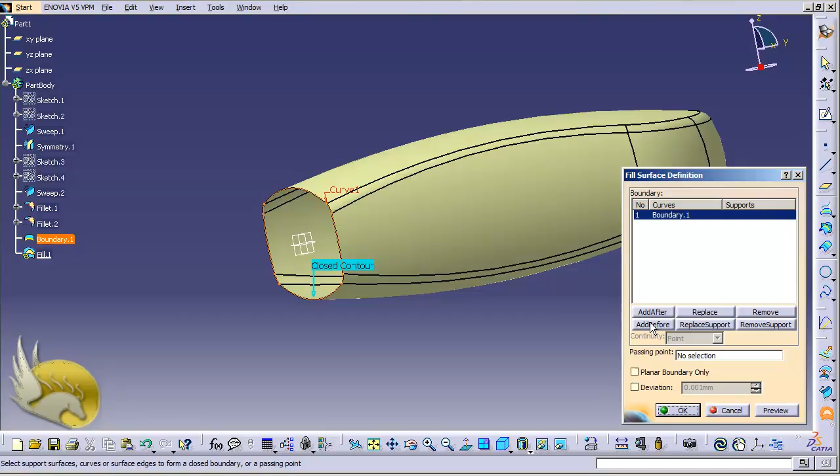Now I can go to Insert Menu, Surfaces, and select the Fill tool. It asks me about the boundary. I select this, and I do not need to modify this selection. I click OK, and I can see that this closes the area. So I hide the boundary, since I don't want to see it here.

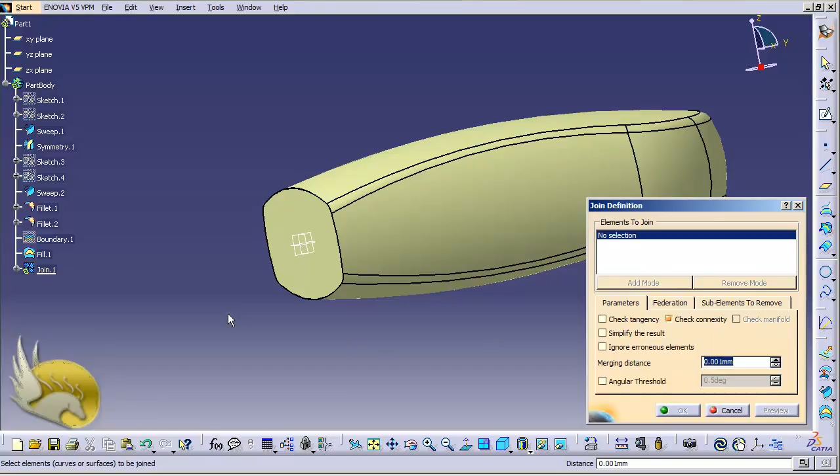The next thing I want to do is join these two surfaces together. So I go to Insert menu again, and under Operations you can find Join. Whenever you select Join, you can select the surfaces - this is the first surface, this is the second surface. Now I click OK, and you can see that the two surfaces have been joined together.

Okay, I want to have some modifications in this bottom area. I want to have a sunken area here so that it makes a prettier surface. So let's select one of the planes - the YZ plane is okay. Here I go to the sketch area.

To create the sunken area, I select the arc tool and draw a very small arc like this. This is going to be an arc. I add some kind of constraint here - I want to make sure that this is about 30 millimeters in radius, so I click OK.

Now you can see that I already have a coincidence here, but I don't want this coincidence - I want to have a kind of symmetry instead. So I select this, select the horizontal axis, and add a symmetry constraint. That's much better than coincidence.

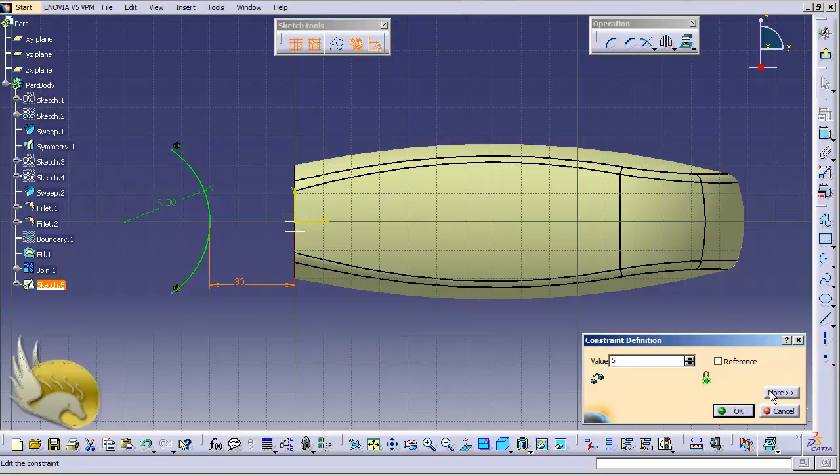Now I have this. I want to select the constraint tool, select the center of coordinates, and select the arc. I can see that this is too much - I want it to be about 5 millimeters, and I want to have it on the other side. So I click on swap location, and I can see that this is here. Now 5 millimeters is too much, so I make it 3 millimeters. I click OK, and I can see that it is cutting the end of my shampoo bottle.

Now it is going to be used as a curve for my sweep, so I exit my workbench. Now that I have this curve, I want to have another profile that creates the actual sweep here. For this, I need to have a plane and a profile. I click on plane here. This type of plane is going to be normal to curve, so I select Normal to Curve.

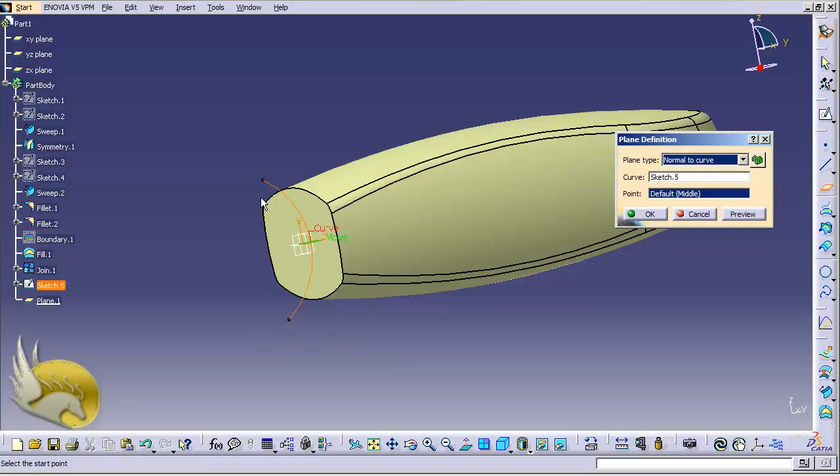It asks me about the curve. This is the curve, and it asks me to specify a point on this curve. I can see that I have two endpoints. This is going to be the point that I select. I can see this is created.

So I click it, select this plane that I have just created, go to the sketch environment, and click here. Now if you see that this plane is in the other side, I can click on normal too, and you can see that it swaps the location, but this is here, so I do not have to go to the other side. So again, I need to create another curve.

So again, I click here and create a curve like this. And this curve is going to be about 30 millimeters again in radius. This is going to be moved this way, and I need to have a symmetry.

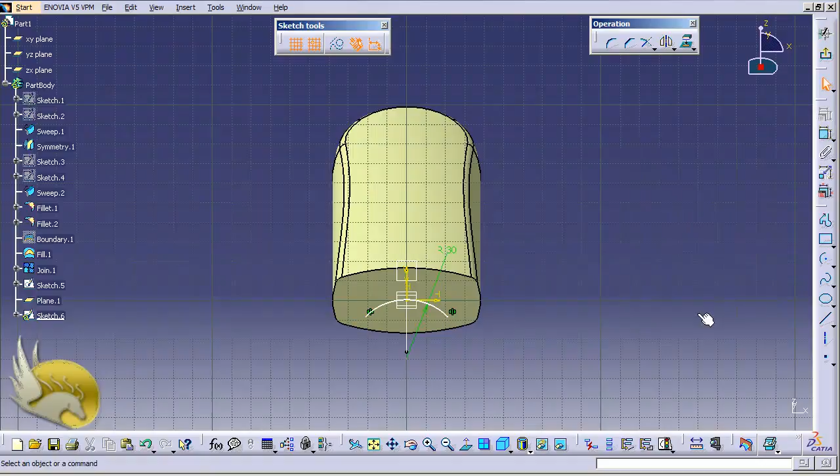So I select this point, and select the vertical axis and go to create a symmetry here like this. Now it's created like this. Let's shift a little bit and see if this is working just fine.

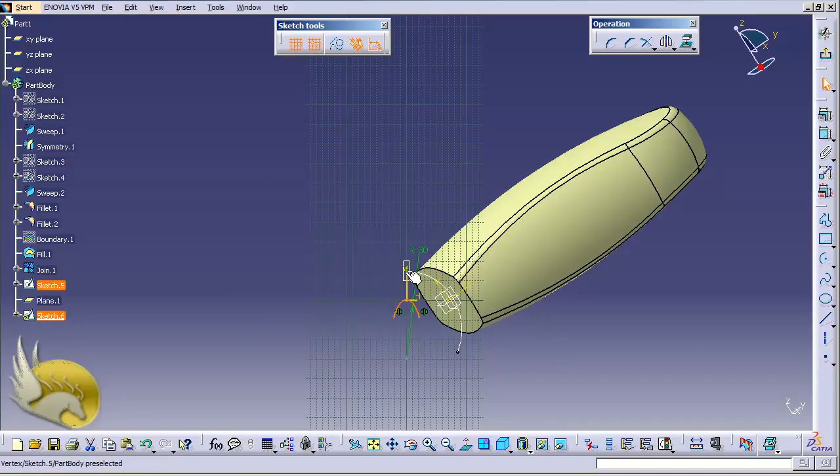Now, the only thing that I need to have is to have a coincidence between this and the point of the other curve. So I select this arc, press Ctrl button and select the endpoint of this curve. Now that I have selected these two, I can release the Ctrl button and select the coincidence. Now you can see that it goes there, and I have two sketches.

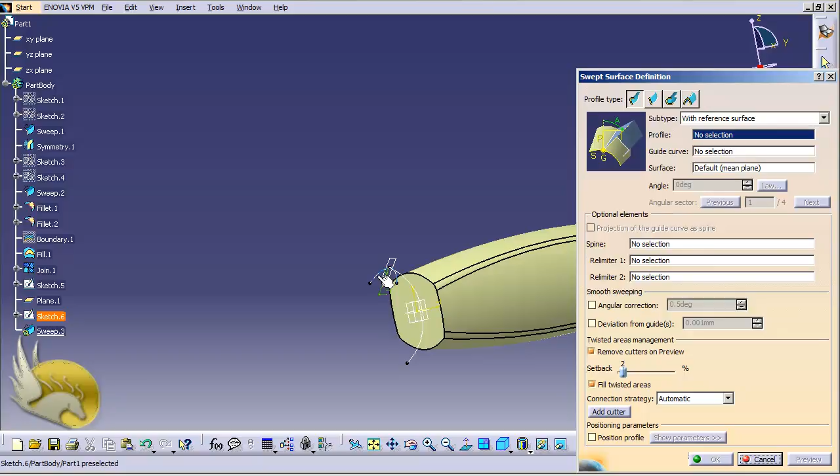Right now, I exit my workbench. Now that I have two sketches, I can create the sweep. I go under Insert menu. Under Surfaces, you can select the Sweep tool. And by going to this, again, I need to select the profile and select the guide.

Now I click on OK. There's a nice sweep here. And now that I have the sweep, the only thing I want to do is use the Trim tool. But before this, let's hide the sketches. I don't want to see this. And hide the plane as well, and hide this sketch as well.

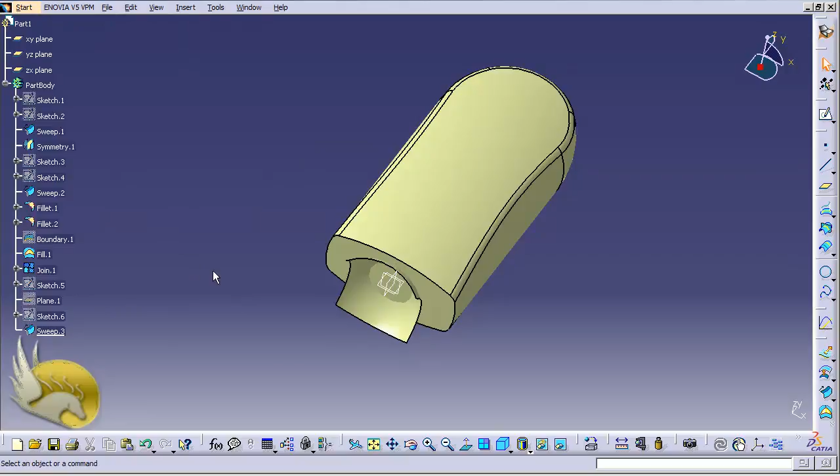Now that I have this, let's go to Insert, and under Operations menu you can find the Trim tool. It's out of your capture area, so let me find it here. I select the Trim tool, and I should select the bodies. This is one of the bodies, the sweep, and the other one is going to be the join. So I select these, and you can see that I have a trim like this.

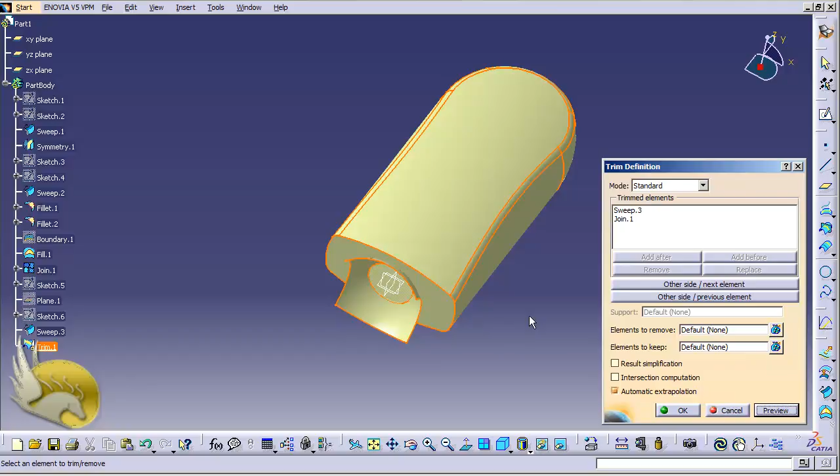So I click on preview. You can see that the preview doesn't actually show me the result. So I want to have this part removed. I can have two sides because I have selected this. One side is the...

The side that I selected first, the sweep 3. And if I click on this multiple times, you can see which part of this is going to be removed. Now, this is okay for me because this part is going to be removed. If I click on the other side, you can see that it turns the join on and off. So I click on preview, and if it is okay for me, I click on OK.

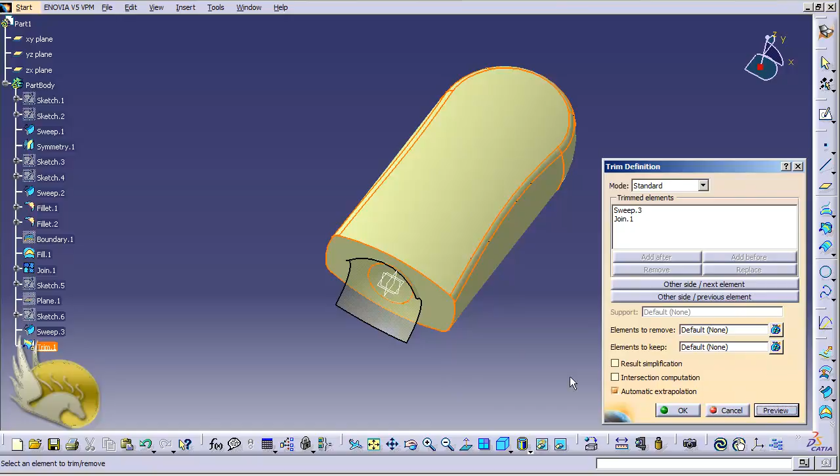Now you can see that I have the sunken area created under this shampoo bottle. Now this is a beautiful shape. You can change it as you wish, but I guess this is okay for me.